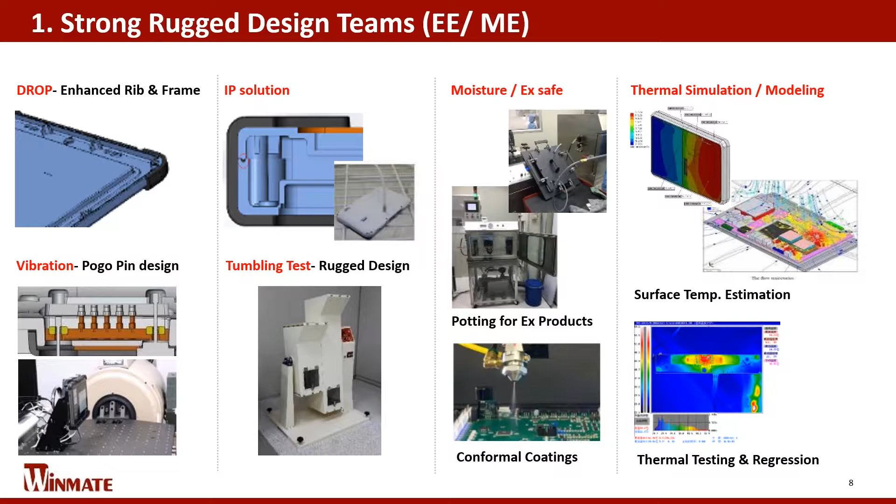These are Winmate's in-house testing facilities. For example, high and low temperature tests can make sure the operation temperature of products are qualified. Vibration, tumbling test, drop test, and impact test can examine if our products are rugged or not.

Secondly, to enable IoT and industrial applications, we build talented software decoder teams from firmware, software, to cloud computing service. Due to the usage scenario in the transportation market, some of our products have ignition design to protect the system itself.

Also, dynamic thermal plan can promote performance and stability of products. Take the healthcare market for example, the surface temperature of products is usually below 48 degrees because this temperature is acceptable to touch for users. Some patients may be disabled, so this kind of design can avoid injuries.

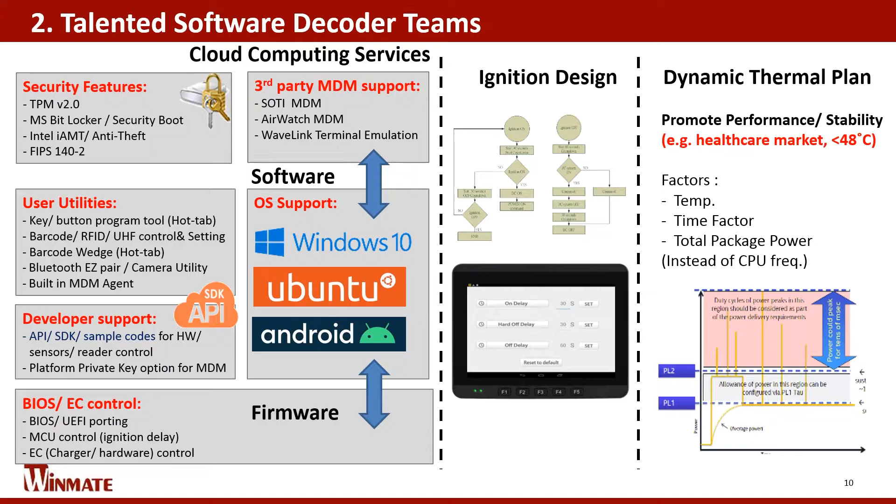In order to solve this issue, you must have a great thermal solution. Certainly, we have rich and sophisticated system integration experience, so customers can save much time and effort, inclusive of panel and touch enhancement, RF or strict certification.

In order to offer customers a one-stop shop and service, Winmate has a complete lineup and has passed various and strict certificates in advance.

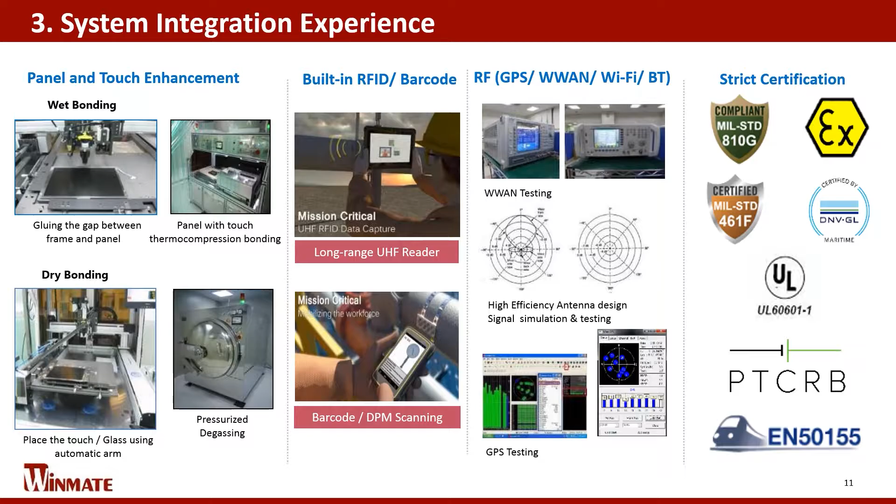For the main topic we are going to discuss, in the beginning I will talk about the market trend and what changes are in IoT applications. Then I will introduce Winmate's IoT structure to help you understand how our edge-to-cloud connectivity solutions work for you. Furthermore, I will highlight the unique selling points of our products in the structure. At last, you will go over our successful stories and understand why Winmate is every customer's best mate.

IoT is one of the popular terms in recent years. IIoT is the abbreviation of the Industrial Internet of Things, and it means using IoT technology in manufacturing. IoT incorporates machine learning and big data technology. More and more companies will opt for IoT as it boosts productivity, increases efficiency, and saves time and money.

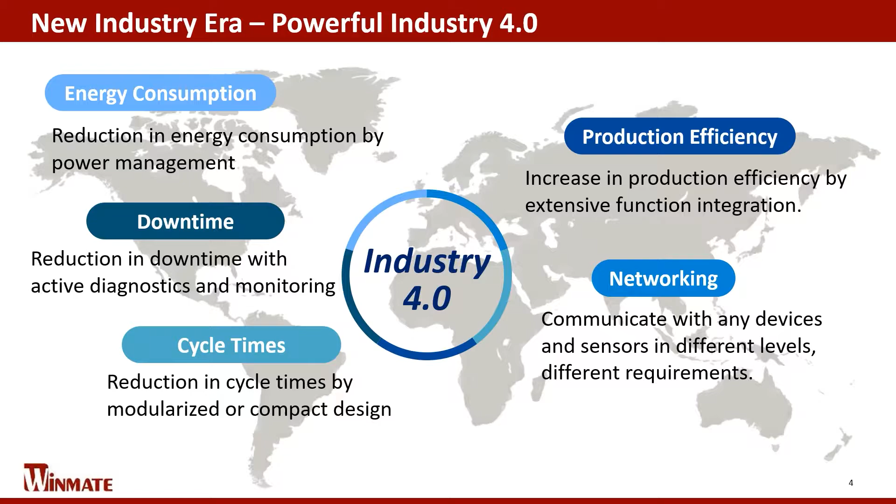It's most likely that the manufacturing sector will continue to transform in the years to come. In the current phase, we are witnessing a shift from manual assistance to automation, thus giving birth to the term industrial automation. Unlike in the past, most modern large-scale manufacturing operations are automated and require minimum or zero human intervention. Industrial automation is certainly able to meet current requirements.

According to the Research Institute Market Research Future, the global industrial automation market is expected to grow to $149 billion by 2022, at a 6% compound annual growth rate between 2016 and 2022. The major driving factors of this market are cost reduction, high efficiency in the process, and the ability to provide overall information and initiate early stage product development.

Actually, IoT exists everywhere, and it helps industry with data collection, data analysis, and real-time control, such as smart retail, smart energy, smart factory, public utilities, and smart building.

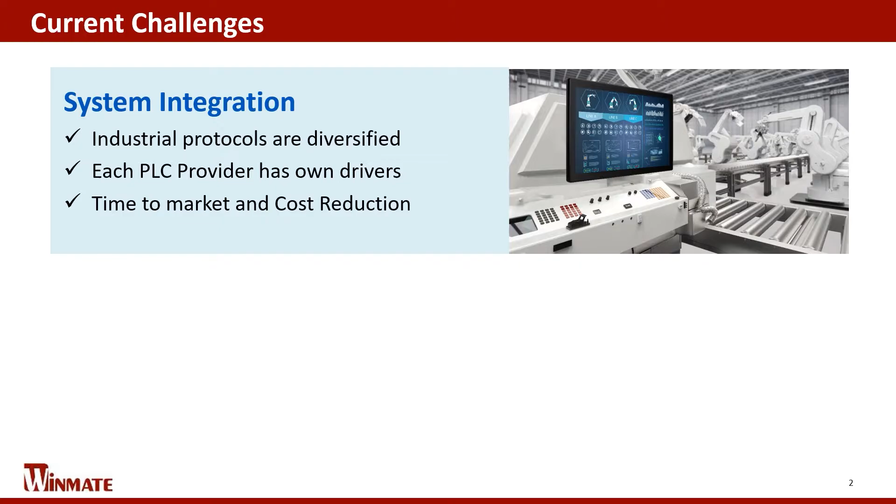The other challenge we meet is device management. Take a solar power station, for example. System malfunctions solved only by manpower are inconvenient and costly. Then, a short malfunction can cause huge losses, but we can't prevent it effectively.

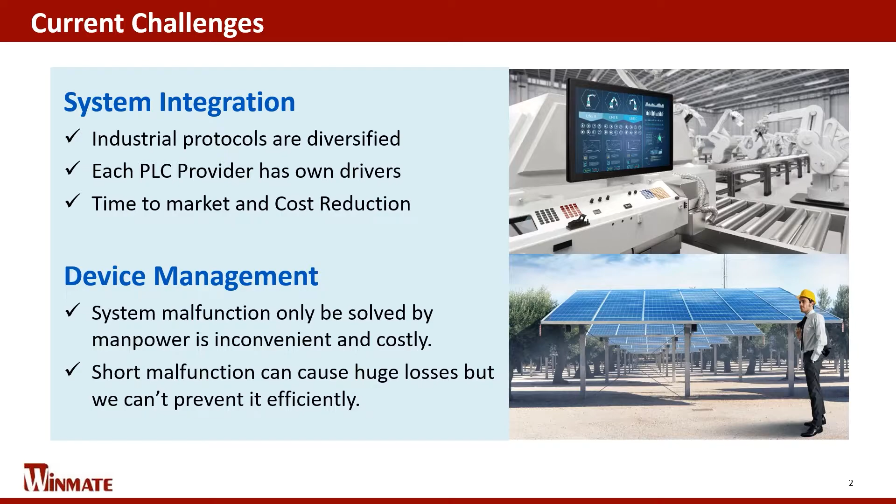Based on this feedback and changes from customers, we have tailored and launched a series of total solutions. It can be used in different vertical markets for IT and OT convergence. The related products include handheld, tablet, IoT gateway, panel PC, display, and a diversified motherboard.

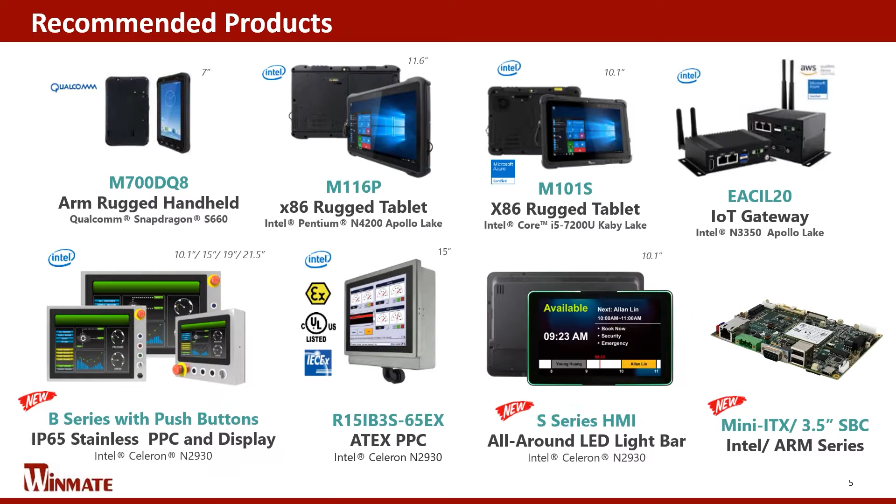For smart production, we can use different kinds of embedded systems for promoting efficiency, cost reduction, and extensive function integration. It may be manufacturing execution systems to reduce cycle time and downtime. It also may be factory waste and energy management, such as data acquisition systems or predictive maintenance. Through IoT technology, we can collect the data from the field site and upload useful data to the cloud.

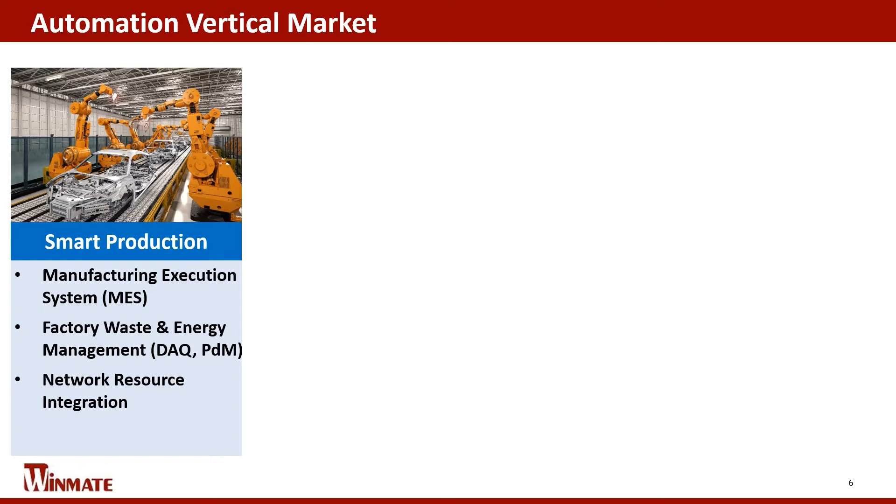Then we can use industrial robots to replace manpower for production 24/7. Factory robotic automation is the process of integrating industrial machinery for repeated tasks very quickly, such as welding, material handling, and assembly. Adding automated robotic systems to a factory has many advantages because it improves labor productivity, cycle time, floor space utilization, quality, and reliability. Companies can save money, increase production, and create higher quality parts.

Next, in order to assure product quality effectively, we can test finished goods by machine vision, such as AOI. AOI is the abbreviation of Automatic Optical Inspection. It's the key technique used in the manufacturing and test of electronics printed circuit boards. AOI enables fast and accurate inspection of electronics assemblies and in particular PCBs. We can ensure that the quality of product leaving the production line is high and the items are built correctly without manufacturing faults.

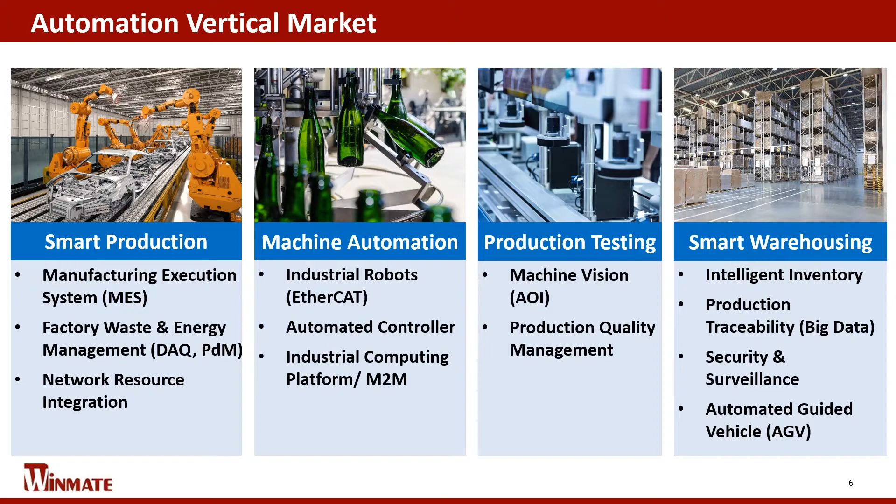Also, we are good at other vertical markets such as energy monitoring, anti-explosion, and transportation.

In this IoT structure, IoT gateway plays an important role to connect IT and OT. In the front end, field devices and sensors capture and transmit the related data through their own protocol, such as Modbus, OPC UA, or CAN bus. In order to save time and human cost for customers, our software solutions integrate the diversified industrial protocols.

Workers can read information for production and get alerts from HMI devices. After the gateway system gets the data, it can upload useful information to the cloud or web service for SCADA, dashboard monitoring, promoting production efficiency, or other business intelligence applications.

Except the HMI and the gateway, we may also offer server products for one-stop shop and services. Also, our PLC driver database can cover 80 to 90% of PLC models in the market. This is a very useful and important feature for customers. Customers can save much time and cost for porting drivers.

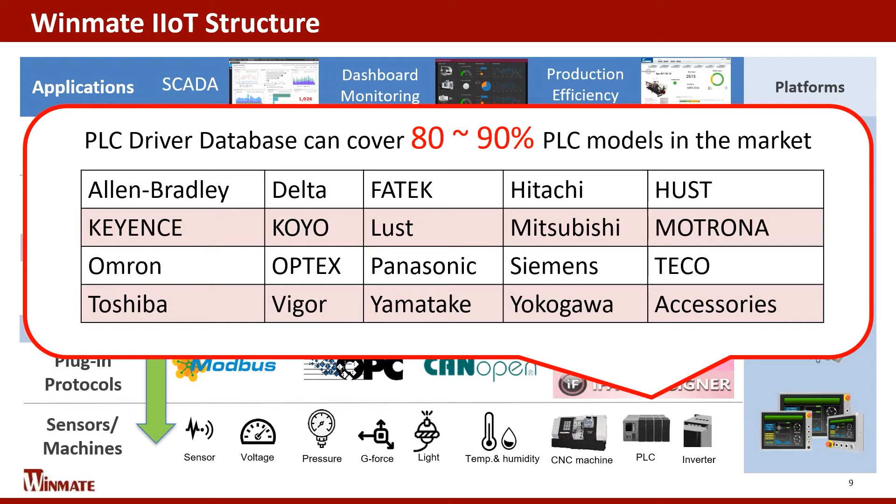In this section, I will highlight the unique selling points of our IoT gateway.

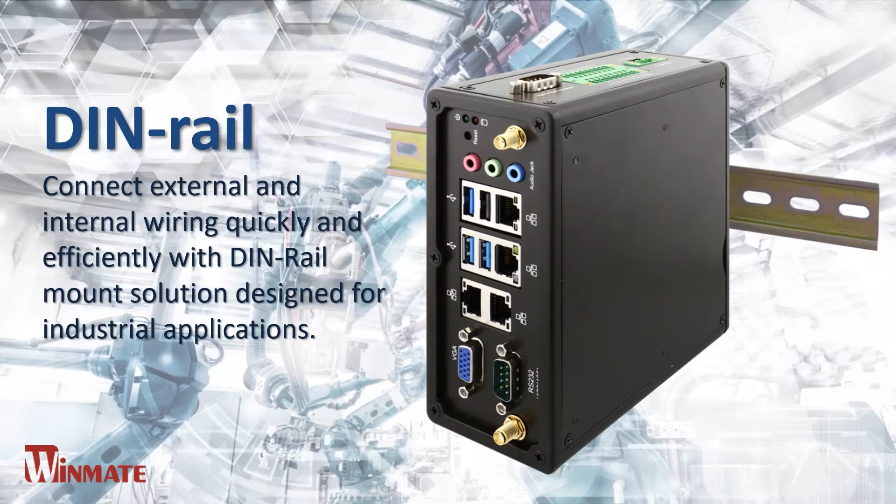Firstly, through the DIN-rail design, we can hang the gateway on the metal rail easily. This kind of design also applies frequently in the factory. It benefits users with easy setup, quick deployment, and easy maintenance.

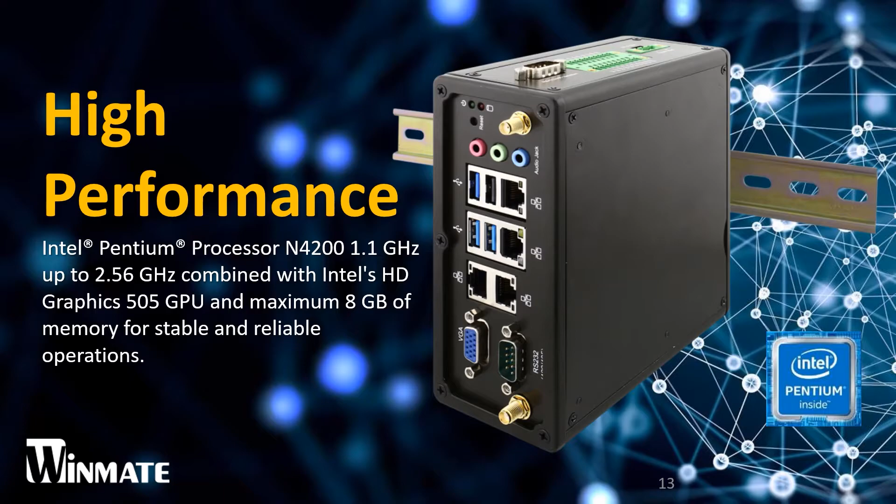To enhance the edge computing ability, we support Intel Pentium processors, N4200.

Also, we have rich I/O ports to cover multiple applications: isolated serial port, digital input, digital output, LAN, or USB interface.

Definitely, safety and reliability are critical in industrial applications, so our gateway has power surge protection and accepts wide voltage from 9 to 36 volts with isolation and ignition control.

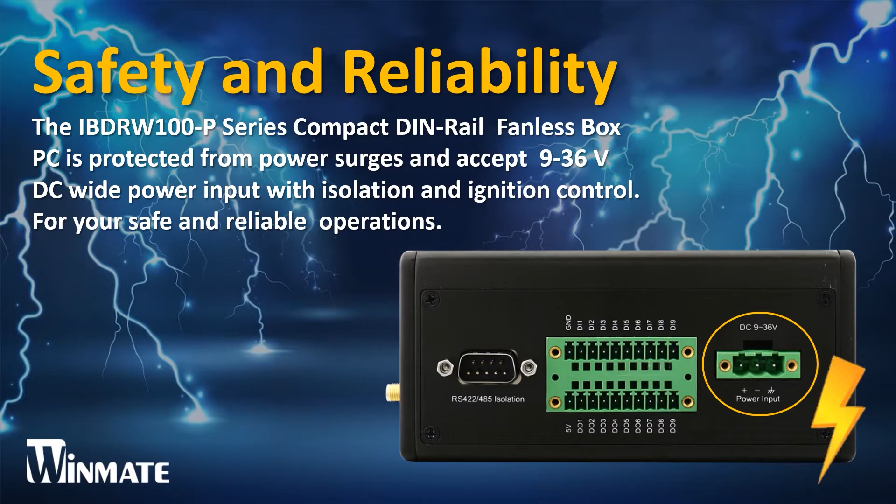Compared to a general PC, our gateway has a heatsink and fanless design for efficient heat dissipation. The gateway can support wide operating temperature from -20 to 60 degrees and is ready for changing environments.

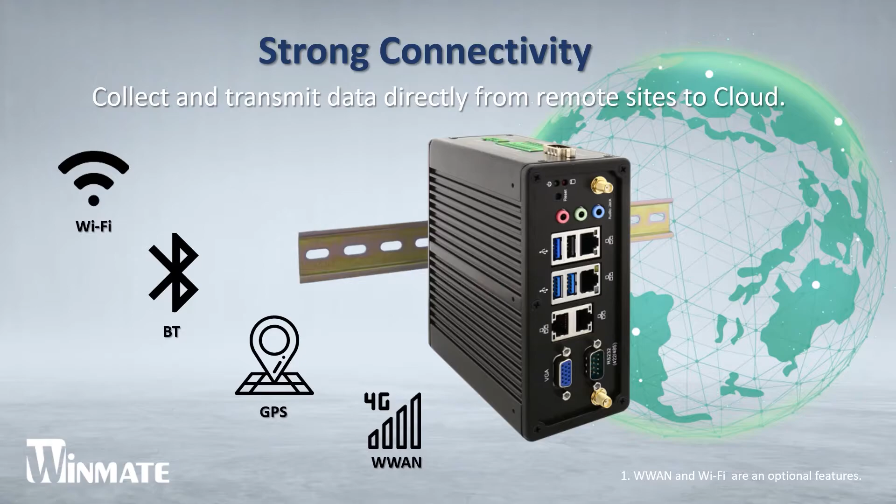With comprehensive wireless features like Wi-Fi, BT, GPS, and 4G, users can access and control field information for promoting productivity, predictive, or other business intelligence applications.

Let's go over our successful story and realize why Winmate is our customers' best mate.

This application story is about a solar energy solution, inclusive of edge computing, data collection, and facility monitoring. At first, the solar panel transfers direct current to energy equipment by the solar inverter.

Then, in order to keep solar panels perfectly aligned with the sun, the gateway will monitor inverter efficiency and status by Modbus RS485. In addition, the gateway also collects environment data for reference.

We can even diagnose abnormal events by the field sensors. For example, the sunshine is very bright but the inverter efficiency is awful. The common condition is that the solar panel was covered by dust.

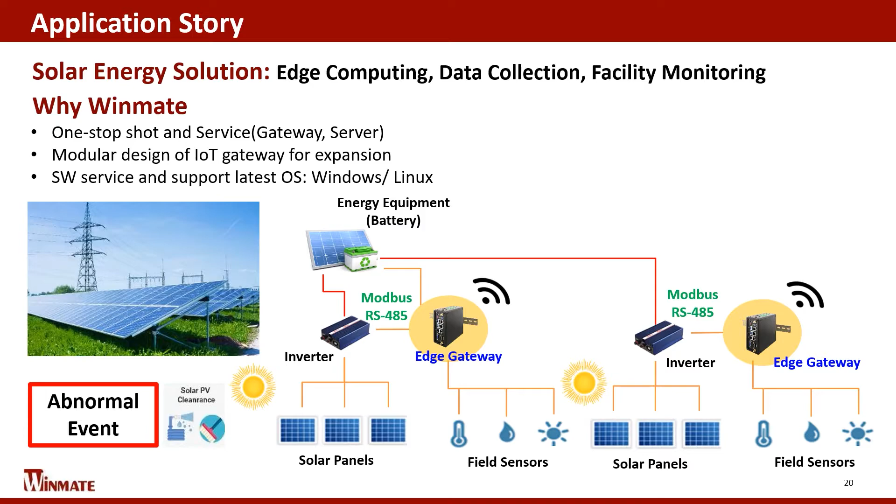Therefore, we can use the I/O interface to activate the sprinkler device for cleaning. And last, the gateway will transmit related information to the cloud or web service for business intelligence, like calculating the estimated income by selling extra electricity.

To make sure of systems' reliability and efficiency, customers also integrate the Winmate server in this structure.

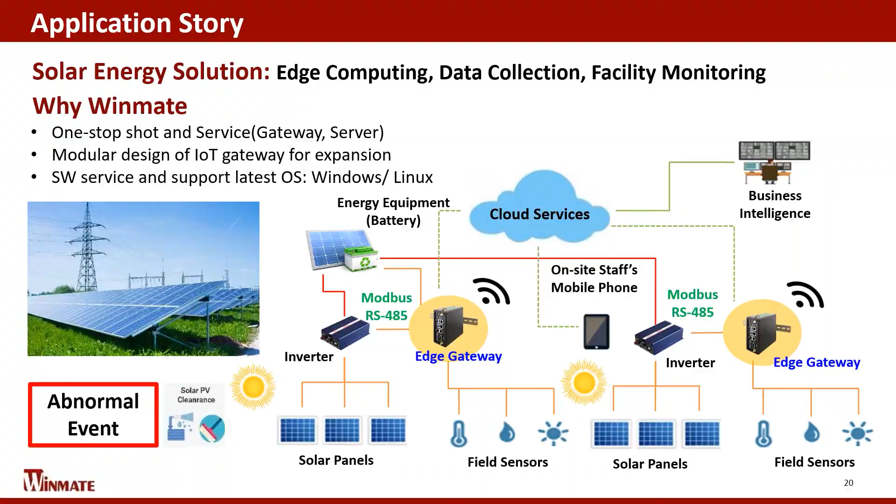However, these front-end devices may make mistakes with extremely low probability. Therefore, we have to integrate the edge gateway and related software solution.

When the gateway receives the data, it will filter and process the data fundamentally to make sure there's no serious mistake from the environment or front-end devices.

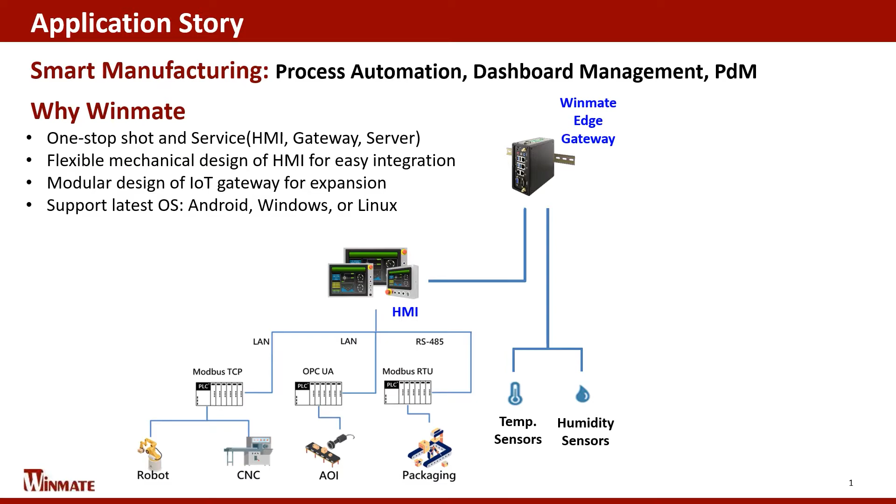Then, the gateway will send useful and trusted data to the cloud. Finally, we can monitor equipment data or product line status from the dashboard for analysis, monitoring, and predictive maintenance.

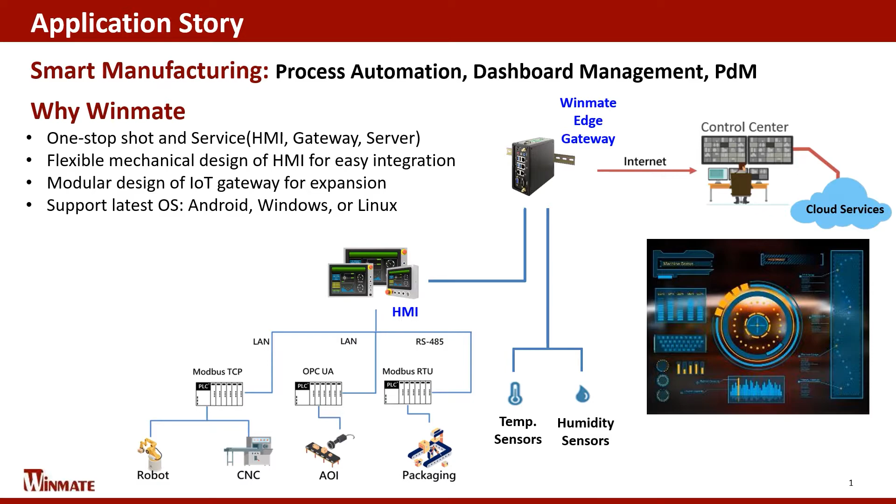The oil and gas industry is still at the heart of the energy supply worldwide.

Efficient and accurate monitoring and control systems are important at every stage of oil and gas production, from exploration and development, drilling and production, to transportation and processing.

These applications are still some of the most dangerous and demanding of any industrial applications, and require rugged and reliable products to ensure safety and efficiency.

Likewise, the gateway is responsible for collecting data from sensors. And last, we can monitor the environment and device status.

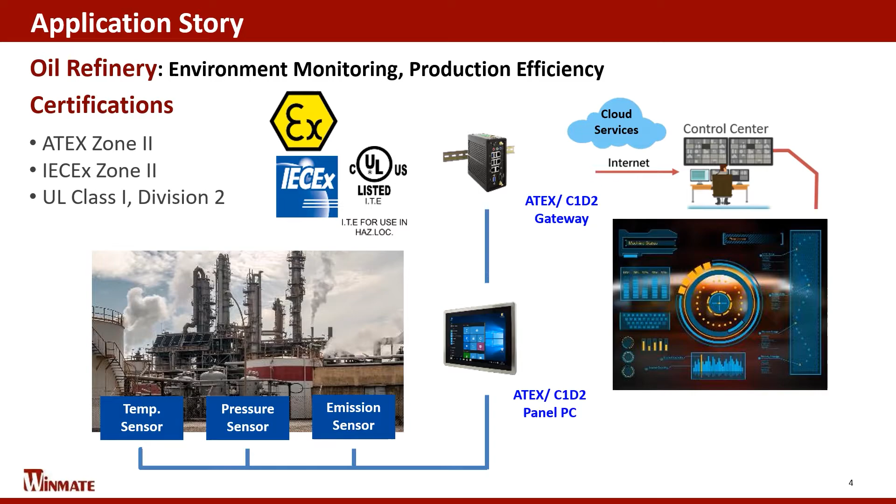Clients can trust the quality, reliability, and durability of all Winmate's products. Also, we prioritize offering excellent customer service and after-sales support for customers.

We may offer a one-stop shop and service to customers. Customers can easily integrate and use a cheaper price to get our package solution together.

If our standard design does not meet your requirement, we can still customize the product for you. In customers' projects, we always show our ability to overcome different challenges and eliminate concerns from the customer.

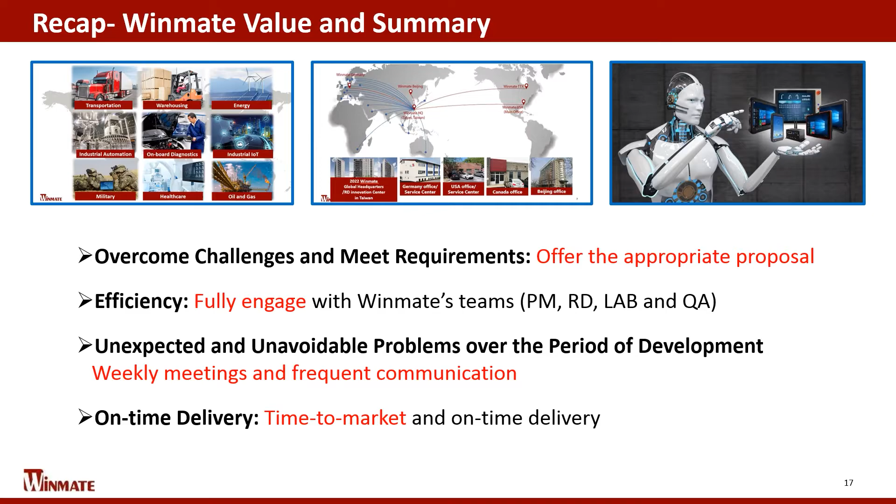Based on what I've mentioned above, we are confident in helping our customer with any project.

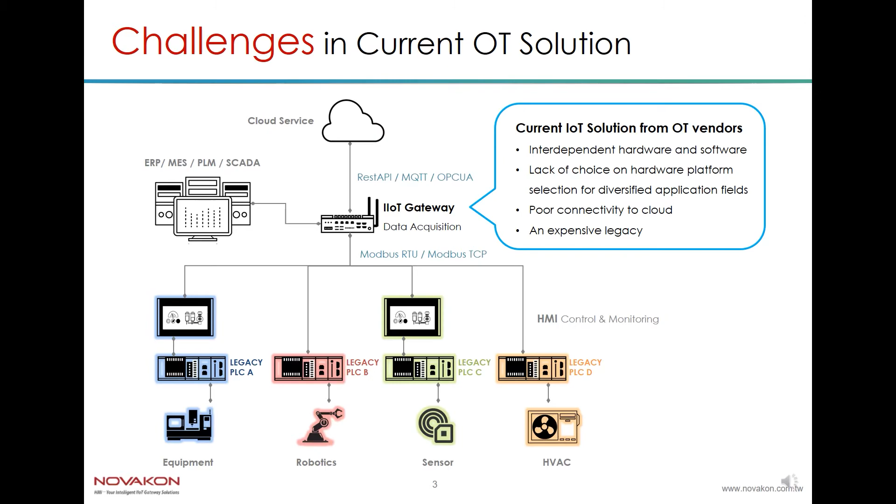Introducing Novakon's industrial IoT solution. It is the solution for gateway application, bridging the legacy OT machines with the IT systems. Using the native PLC driver database built inside our package software, and thanks to the Docker technology, we are able to put these driver containers inside diversified gateway platforms and brands. Now, any gateway selection equipped with our software inside is capable of recognizing the languages the legacy PLCs are speaking, collect the data and decode them for further treatment or analysis in the SCADA, ERP, MES, PLM systems, or cloud services.

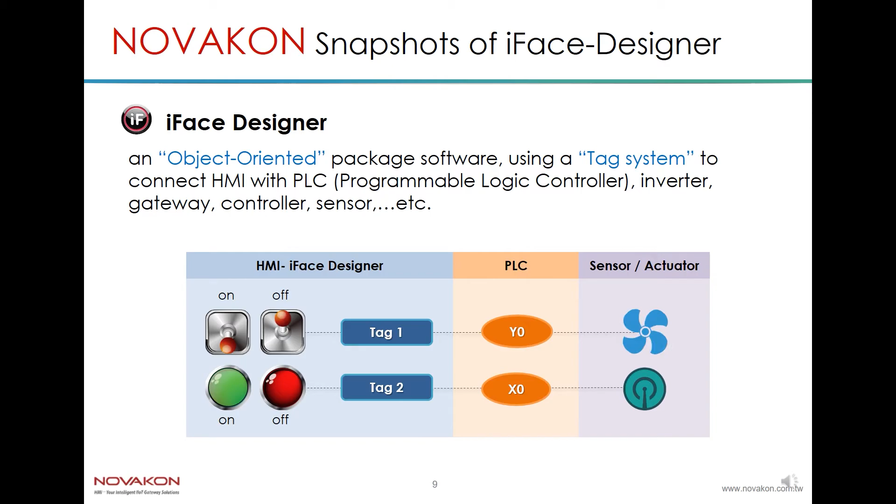Likewise, a sensor is wired to the input of PLC X0, bringing the sensor data back to the HMI screen through tag number 2, so the user is able to tell the status, the value sent back from this particular sensor.

There are two major functions of iFace Designer. First, a splendid vector graphic library. These vector graphic widgets include buttons, indicators, meters, and all types of tables and charts that are scalable without any distortion or being pixelized. Also, wide coverage protocols and PLC driver database that support over 90% of mainstream PLC models in the market.

In addition, iFace Designer provides a series of smart functions, making the control and monitoring process more intelligent, including Data Logger, to store data acquired in the set frequency for further display or analysis, and the Alarm Service to send alert while the set condition is met and also kept as the alarm record.

If you wish to automatically trigger actions responding to the met condition, Trigger Service can do the work. You can also set certain automatic behaviors periodically through a Scheduler Service. Parameters can be set into groups by Recipe function to simplify and cope with different requirements.

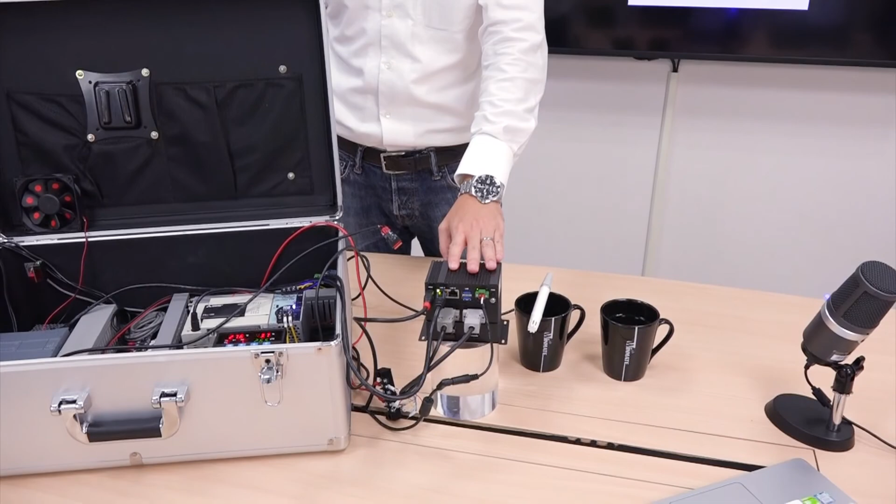Now we use Winmate's IoT gateway, the EAC Mini, as the example, with Ubuntu 18.04 operating system and Novakon's driver container installed, connecting with Mitsubishi PLC FX3U through RS422.

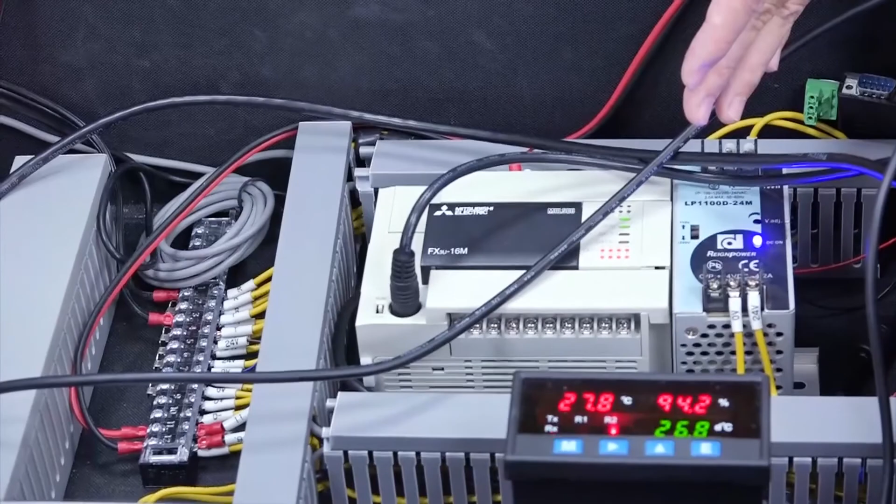Siemens PLC S7-1200 through Ethernet, and the Modbus temperature and humidity sensor through RS485.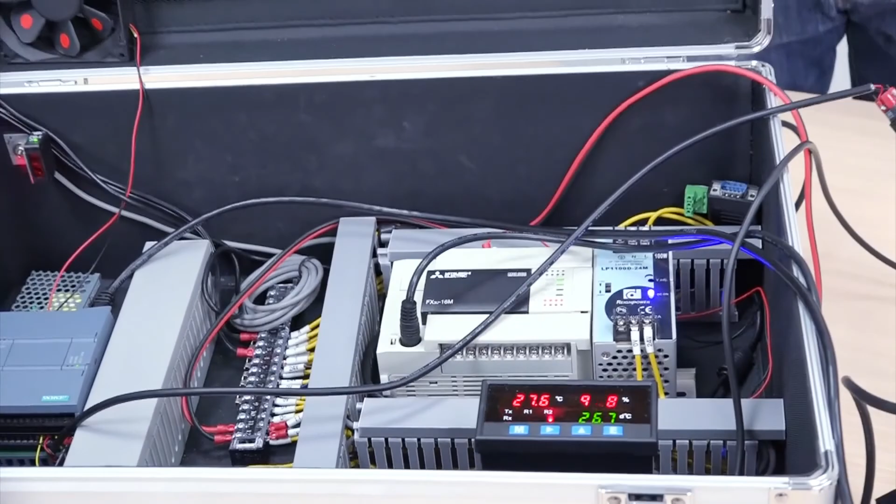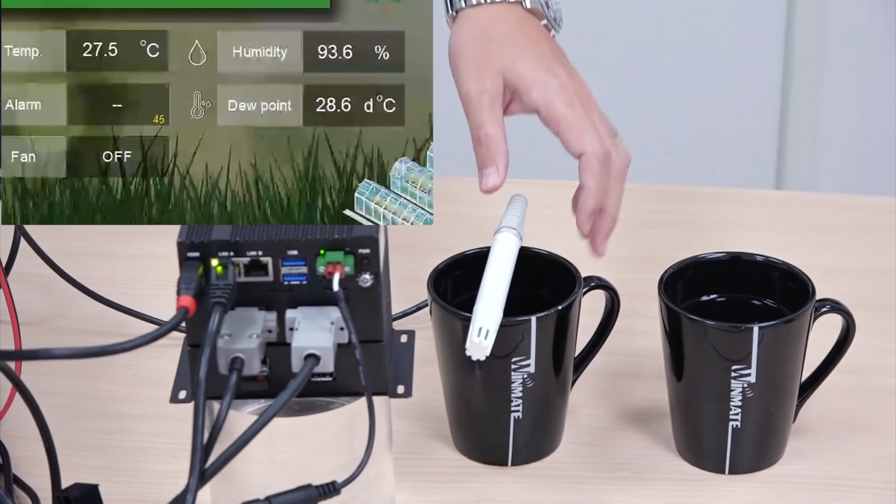For demonstration purpose, we make a simple dashboard as simulation in the agriculture monitoring scenario. All the data is sent back to EAC Mini in real time, including the changes in temperature and humidity level through these sensors.

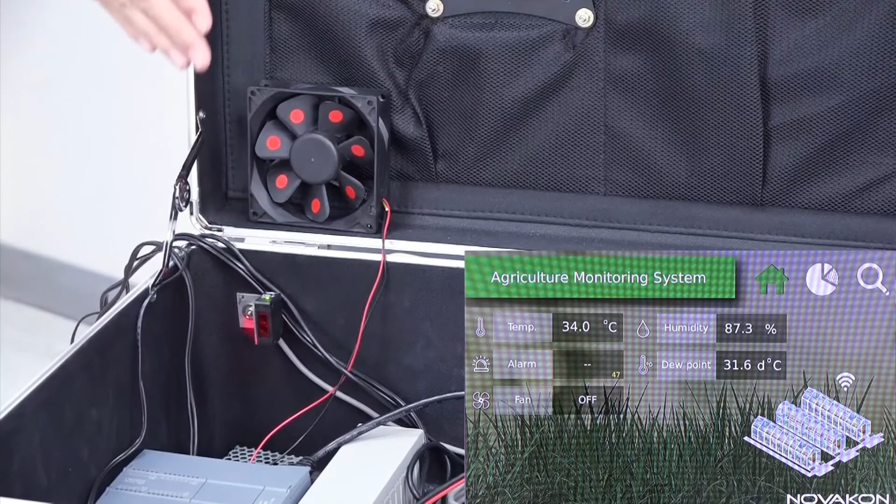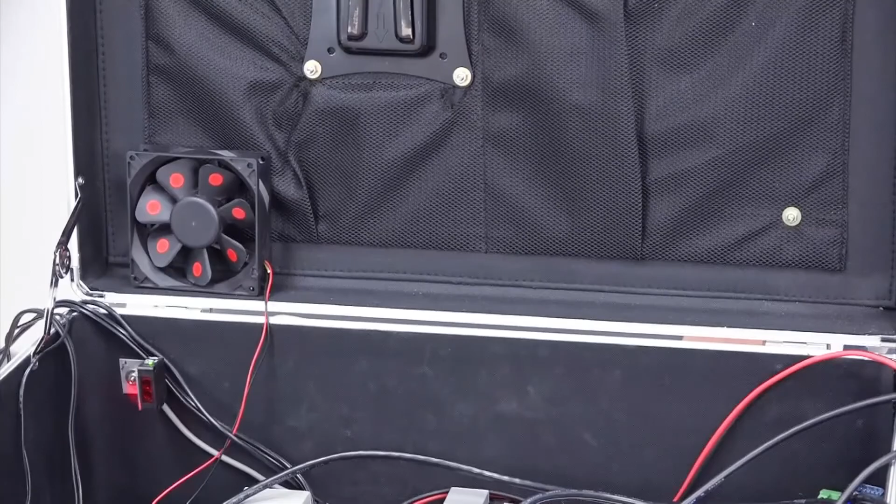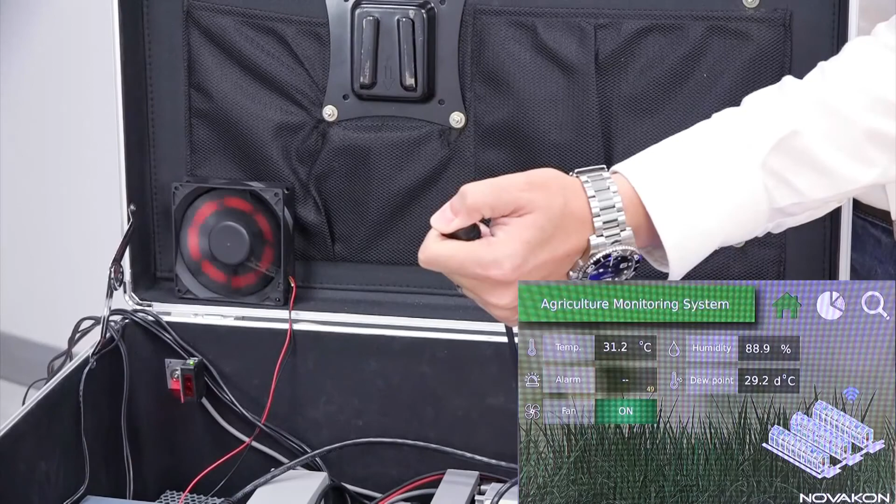The detection of trespassing by this photoelectric sensor through Mitsubishi PLC back to the gateway, shown as the alarm with the alarm counter. And lastly, the on and off status of the fan through the Siemens PLC back to the EAC Mini.

Now, all the data are collected through EAC Mini as record, which can be further displayed and analyzed.

Now, who we are and what other products or services we can offer. Novakon is the solution-based company with our own software for HMI and industrial IoT gateway, as introduced previously. We have ARM-based HMI as standard hardware to carry the software runtime as a complete system.

Software as our core business, we also provide solution-based OEM and ODM services. All our products are designed and manufactured in Taiwan. We provide customer-oriented services and timely engineering support to our customers.

Novakon HMI hardware product line is simple and clear: 3 series from ARM9 400 MHz CPU, the entry-level N series; ARM Cortex-A8 1 GHz single-core CPU, the P series; to ARM Cortex-A9 dual-core 1 GHz CPU, the S series.

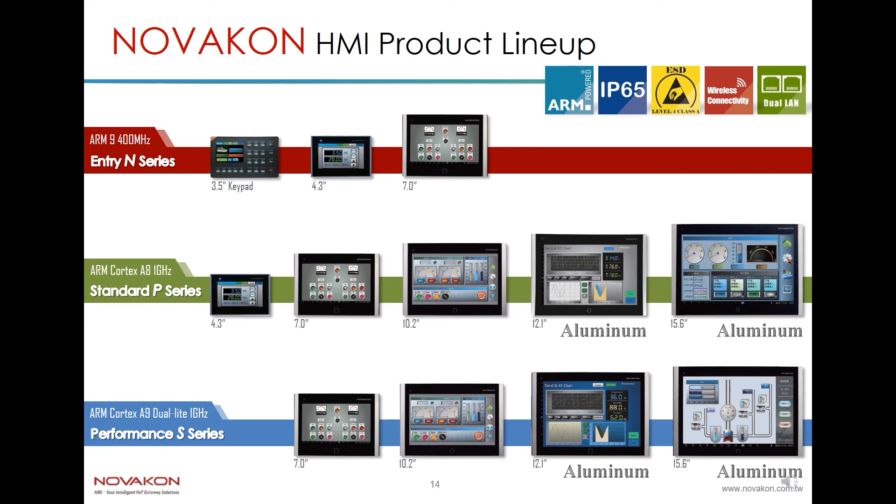Novakon's core competence is our software, iFace Designer. From the core, we provide customization by either using our standard package software or even creating project-specific functions as customer-oriented services. And due to the nature of cross-platform software runtime, with Novakon or any other partner's hardware offerings, we provide you with a tailor-made turnkey solution as one-stop service.

One of the recent success stories is in the power monitoring application. Our HMI hardware and software solution is adopted in the power cabinet, deployed in data centers. So far, over 30,000 units have been installed during the last 3 years and will continue to roll out. We expect higher growth in the next 5 years.